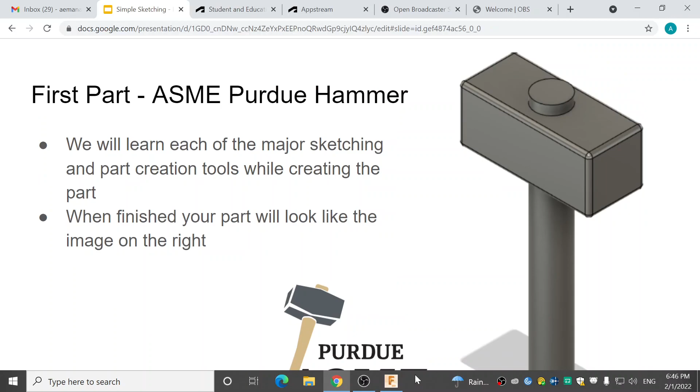First I'm going to direct your attention to the very bottom of the screen. You'll see a small toolbar of 6 or 7 different tools down here. This is going to be very helpful for navigating Fusion when you're looking at parts.

First is the pan tool. It's at the bottom, third from the left, and it looks like a hand. If you hover over it, it says the word pan. If you click on it, that's the pan tool. Now if you use your mouse, or a trackpad, you should be able to move around. It's kind of hard to see because there are no grid lines, so I'll give us some grid lines. The pan tool allows us to move around in different directions.

When you want to get out of the pan tool, go to the top right and you'll have a select button. If you hover over it, it says select, and you can get out of that tool. The next tool I want to show you guys is the zoom tool.

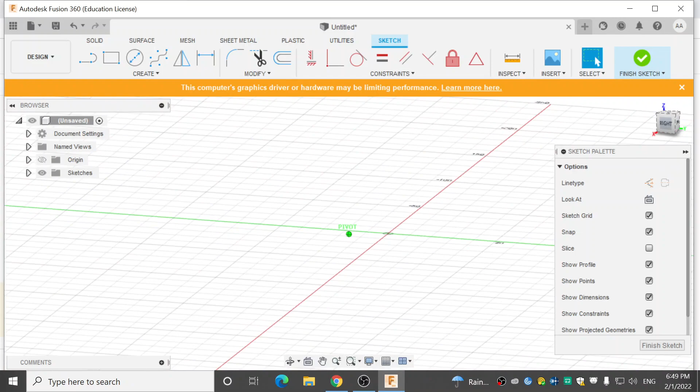If I hold down on the cube, I can drag it and orbit my perspective. So instead of moving in only 2 directions, I can now see a 3rd dimension of the screen. If I click on the word that says right, it will automatically send me to that perspective. I can use these arrows and the edges and corners to send me to different perspectives.

If I click this arrow, it'll send me to front. If I click this edge, it'll send me between the front and left side perspective. If I click the corner, it'll send me to an angle. And the home button will send me to my standard viewing area.

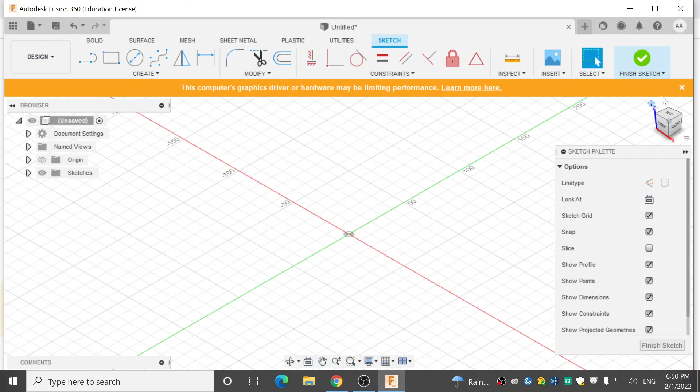So with that, we will get started. First I want to make sure everybody's screen looks at least something like mine, where at the top the word solid is highlighted in blue. If it's not, you might see something a little different, it might look like this or that. You want to make sure you are on the solid bar, because that's what we're going to be focusing on today and for most of our lessons.

The very first thing that we're going to do, to build our hammer, is we have to sketch an object.

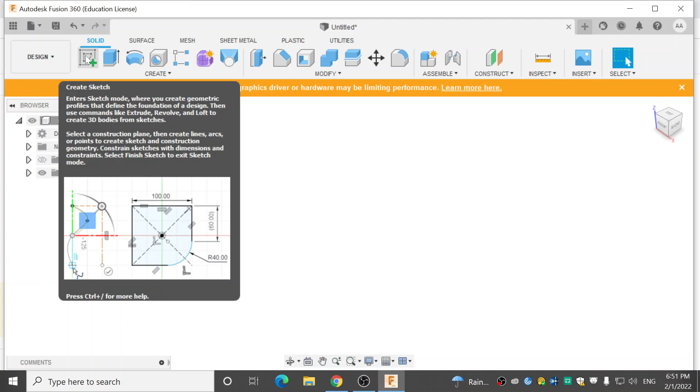We start in 2D, and then from there we'll build up into a hammer. There should be a button with a little green plus sign on it, and if you hover over it, it should say Create Sketch. If you click on that, it will prompt you with 3 different planes that you can choose to sketch on, like the XZ plane or the YZ plane, but preferably, at least for this, we'll be sketching on the ground plane, so the XY plane.

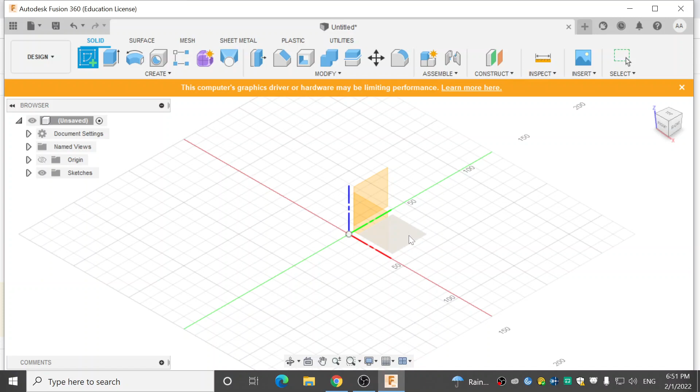When you do, it should automatically send you to this perspective. If for some reason it doesn't, you can find the word top on the rotating cube on the right-hand side, and you should be able to click on that, and it will send you to this perspective.

So the first thing that we're going to see is that our top toolbar is completely changed. It's no longer the solid tools; we're now in the sketch tools. So they do look a little different. So to start our project...

A lot of engineering classes and jobs want you to have your units for your screen set in inches as opposed to millimeters. The standard for Fusion 360 is going to be millimeters. So to quickly change that, you'll see on the left-hand side there's a few different file management tools here.

The first one we're going to look at is Document Settings. If you click down the arrow on Document Settings, you'll see that your units are listed below, and at least for mine, it says millimeters. If you click on the pencil and paper on the right-hand side of the millimeters units, it'll prompt you with something you can use to change your units to. So I can change it to centimeters, meters, inches, or a foot.

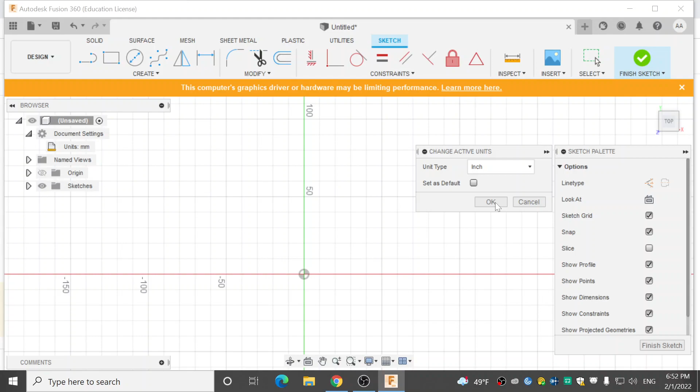So today we'll be using inches. If you're more comfortable with millimeters, that's fine, but we'll be instructing mostly in inches today. Once I've selected inches, I can set it as my default if I want, and once I've decided on that, I can click OK, and it will save my new units.

Now my perspective has changed a little bit, as now it provides me with how many of these squares is a certain number of inches. So the first thing that we're going to do to create our hammer is we're going to go to the top toolbar.

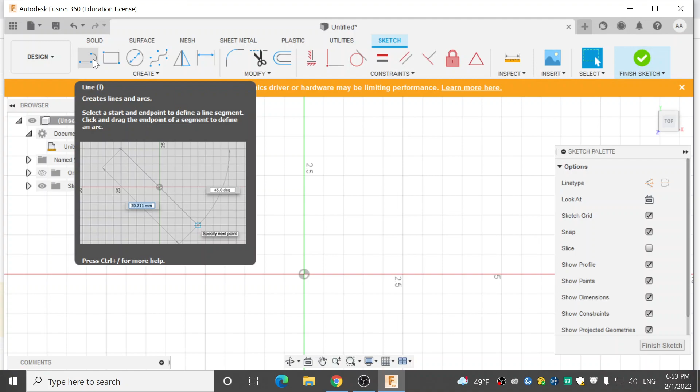There are a few tools listed up here, and these are just your pinned tools. These are what Fusion populates for you to tell you what they think will be most useful. We're going to open up this Create window. There's the word Create; you should be able to click on it, and a whole list of different tools will pop up. You should be able to scroll down.

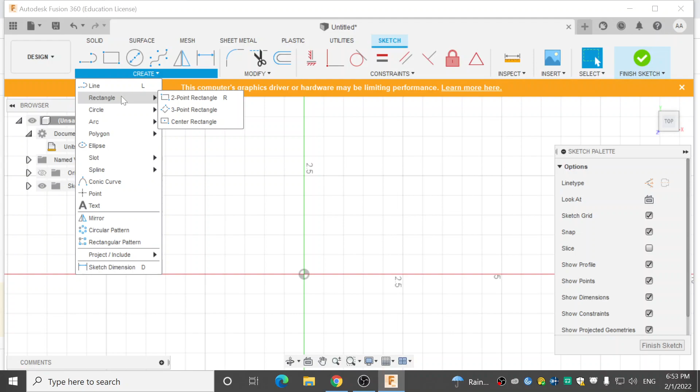We're going to need to start our hammer as a rectangle. If you hover over rectangle, you'll see there are 3 different options: your classic 2-point rectangle, which is typically what we'll be using, your 3-point rectangle, and your center rectangle. Today we're going to be using the center rectangle just for ease of making this hammer.

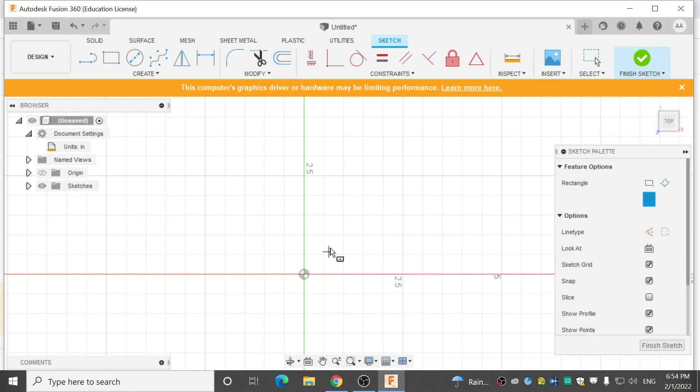So you'll click on the center rectangle, and now your mouse will most likely turn into a plus sign. If you were to click anywhere, you would start to build your rectangle, but for us, we want to start right on the central point between the X and Y axes. So I'll click on that, and visually you might not see anything, but as soon as you move your cursor away, you'll see that you are going to be drawing a rectangle here.

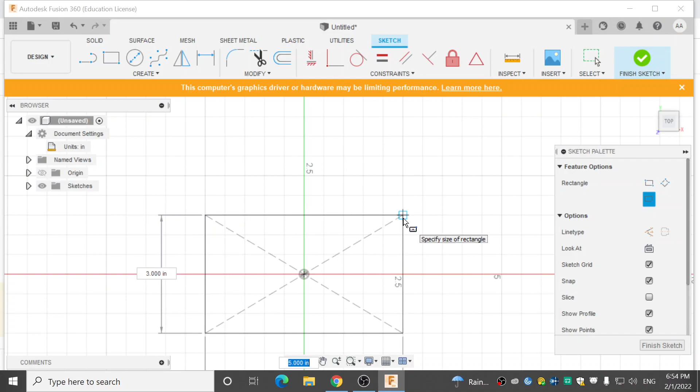So the first thing that we're going to want to do is set these dimensions. We want to have a fully sketch-dimensioned hammer. We want to make sure that we know exactly how big our hammer is going to be, every piece of it. So the first thing you'll notice is as I was moving, one of the dimensions, my base dimension, is highlighted in blue currently.

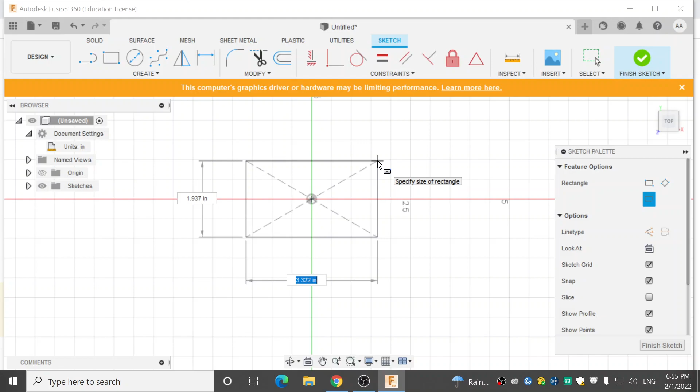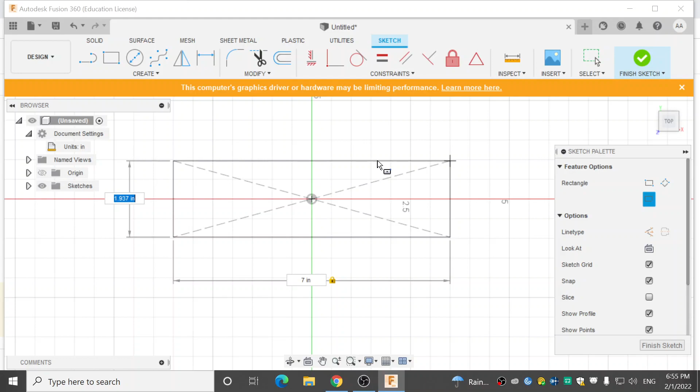This means if I were to start typing into that box, it would change that dimension. For the length of this rectangle, we're going to make it 7 inches. So I can type in 7 space IN, and a little lock sign will show up. Without hitting enter, I'm going to hit the tab button, which will send my cursor into the next box. Now that I've sent that into the next box, I've highlighted my height dimension, and I will change that to be 3 inches.

And now we'll see that I have a decently sized rectangle. I'll hit enter, and now these dimensions here are listed for us. You can click and drag on these lines to move them into position, just to give yourself some space if you didn't like where they're placed.

A plane that is fully sketched is shown with the lines in black. If they are in blue, that means your sketch is not fully developed, and there's something else you can do, either an angle or a length dimension, as well as if the shape you've made is not blue on the inside. Notice how here there's blue on the inside of my rectangle, but on the outside it's white. If it's not blue, that means the shape you've drawn is not a plane, and if it's not a plane, you will not be able to make a 3D object of it. So you always want to make sure your planes are highlighted in blue.

When you're satisfied with the shape you've just made, the next thing we're going to do is go to the big green check mark to say Finish Sketch. There's also another Finish Sketch button at the bottom of this sketch palette in blue, but I typically just use the Finish Sketch at the top right-hand side of the screen. Once you've located that, we'll go ahead and finish our sketch.

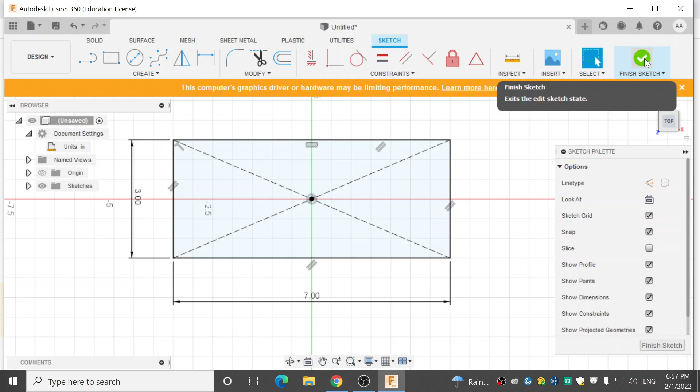It should send your perspective back to your home's perspective. If it doesn't, that's fine — you can always click the house button and it will adjust your screen view for you. For this next step, I would recommend a more three-dimensional view as opposed to the flat 2D sketch view.

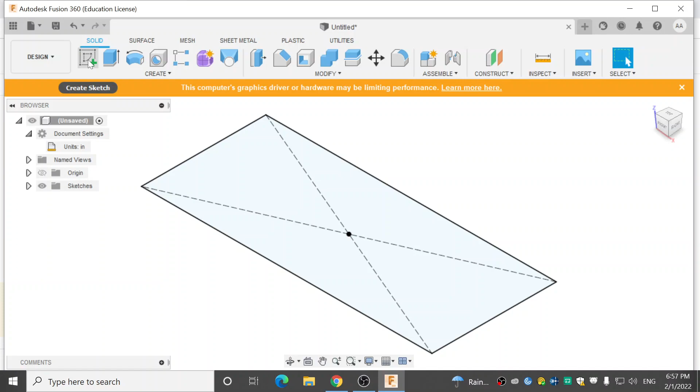If you'll notice, our toolbar at the top now says we went back to solids. We could hit Create Sketch and start another sketch, but instead we're going to use the tool right to the right of that one. It looks like a blue cube with an arrow next to it, and it is called the Extrude Tool — if you highlight over it, it'll tell you that. The Extrude Tool will be able to take any plane you've made and turn it into a 3D object based off the shape you've made.

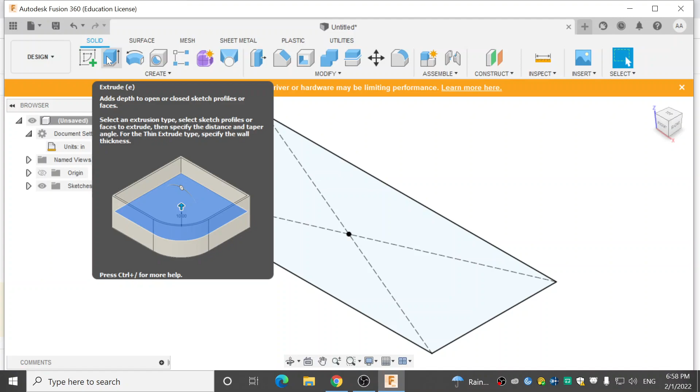If you make a circle, it'll turn it into a cylinder. If you make a square, it'll turn it into a cube. So we're going to click on the Extrude Tool, and it automatically selects my only plane. If you have other planes, you'll be able to click on them. If it selects the wrong plane, the extrude palette to the right tells you one profile is selected — you can hit the X, and now I have no profile selected, and I can manually select a given profile to extrude.

There are different types of extrusions: your standard extrude, and the thin extrude — we'll get into that on a later day, but today we're doing the regular extrude. There's the start, with different options: profile plane, offset, or object. We're starting from this profile plane, but if you wanted to start extruding from a certain distance above what you've drawn, you could use the offset option, or the object option.

For direction, we can extrude from one side, from a different height on both sides, or symmetrically. For us, we're just going to make sure that one side is selected. For distance, if you had another object directly above your sketch plane and didn't know the exact distance — say it's between 30 and 31 inches — you can click on object and select it, and it'll extrude exactly the right amount. But we don't have an object, so we're going to use the distance function.

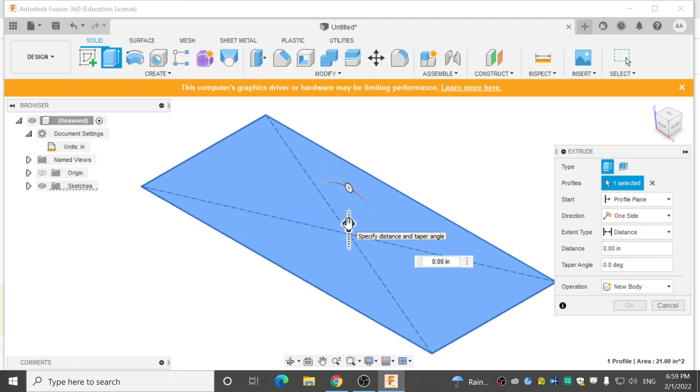For this distance we're extruding, you can either manually type it in, or grab the blue arrow that should be in the center of your square, and drag and pull it up.

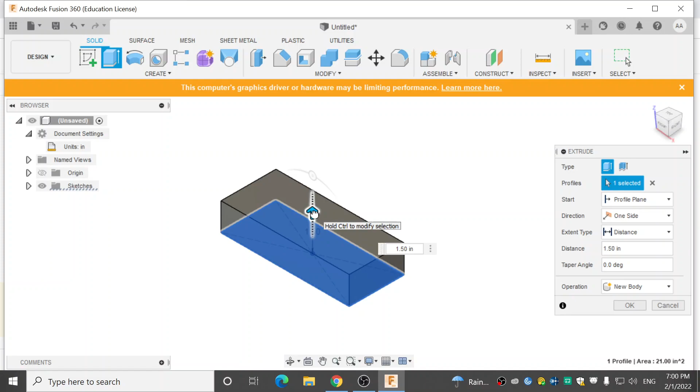The more zoomed in you are, the smaller the steppings are going to be for the extrusion. If I zoom out and drag it up, it'll then propagate by 0.5 inches, as before it was moving up by 0.1.

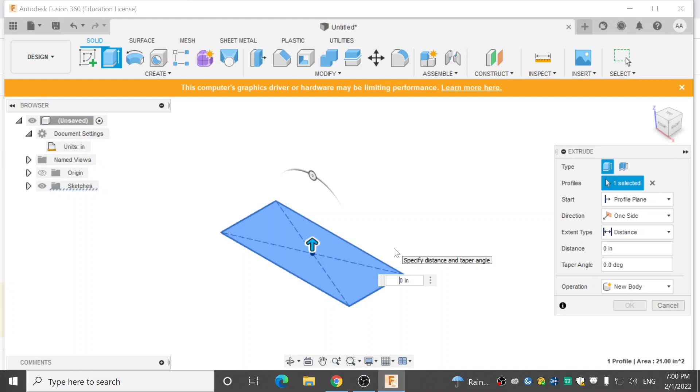But for this, we want it to be a square-faced hammer, so we will make the face of the hammer the same length as our smallest base side, which was 3 inches. So I will go ahead and manually type in 3 inches there.

This operation can happen a couple different ways. We're going to want it to be a new body. There are different options - if we were working with another object, there could be the join feature, which combines our objects. There's also the intersect and cut tools, which are helpful, and we'll get into those another day. So make sure new body is selected, and we will hit OK.

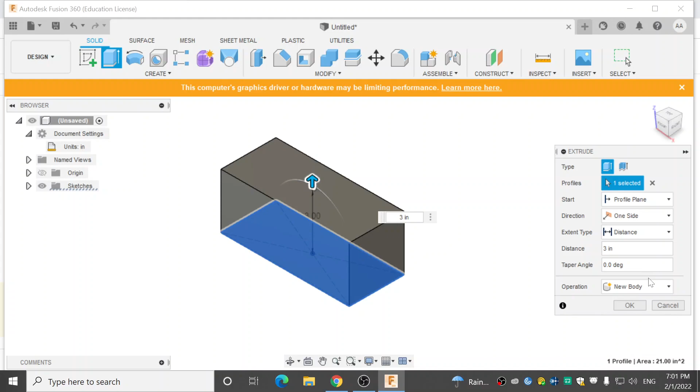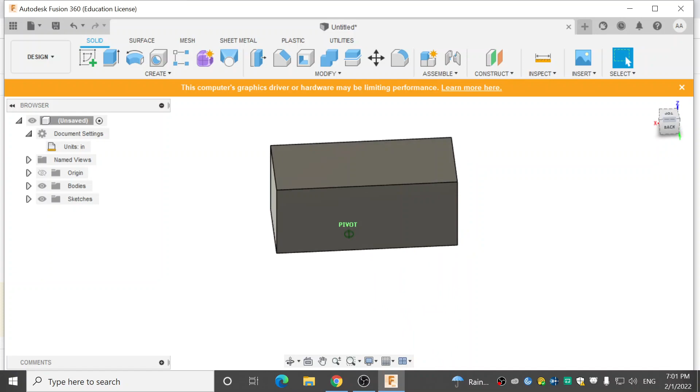Once Fusion has finished loading, you now have a box. You can use your cube at the top right corner to examine your box, your hammerhead, and see how that looks. The next step in building our hammer is obviously going to be the handle.

So to build the handle, we're going to start the same way we did before, and we're going to build a sketch. We'll go to the top toolbar to the far left side and find the Create Sketch button, and click on that.

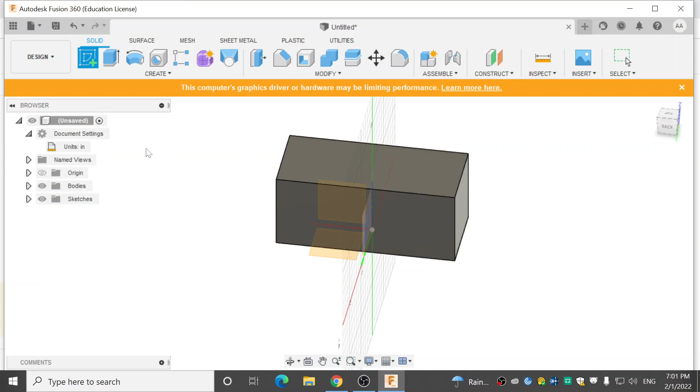Instead of choosing one of these main three planes that have just shown up, we now see that we have the option to click on the faces of our object. So we'll click on one of these long faces, preferably the one that's parallel with the XY plane, and now it will send me to my sketch view.

At the sketch view, again, if yours doesn't send you there right away, you can find the word 'top' on this cube here, and it should send you right to where you want to be. Now that we're on this view, we'll go to our toolbar here, and notice if yours isn't there immediately, that's okay.

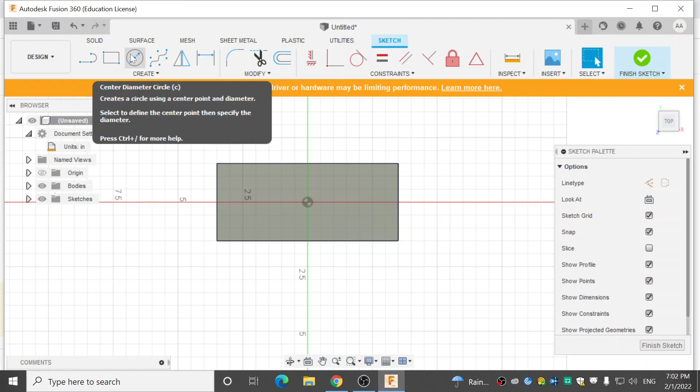We're going to be drawing a circle on our plane here. If the circle isn't there for you, go to the Create tab - underneath Line, underneath Rectangle, there is the Circle option. For our purposes there are many different options, but we want to click the center diameter circle.

Once we've selected that tool, we'll see the plus sign on our cursor again, and we should select the center point of the X and Y axes, right in the center of our rectangular object. I'll click on that, and as I drag my mouse out, it will make the circle at different sizes.

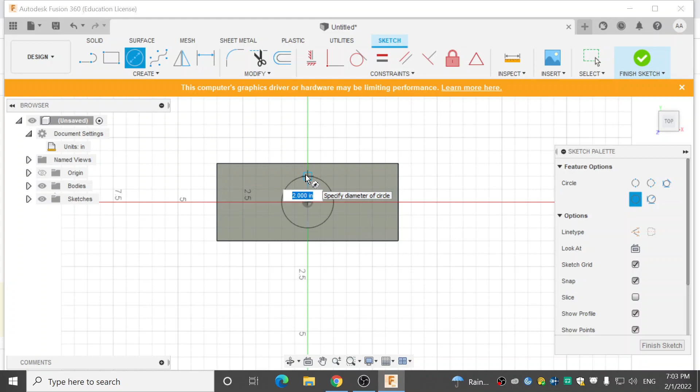Just based on the perspective of how big you made your hammer - for me, because I made the distance only 3 inches, I'm going to make my circle diameter 2 inches. Once I either manually type that in, or find 2 inches exactly like I do on my screen, I'll just hit select, and that will propagate. If you manually typed it in, you can also just hit enter.

Either works. You'll see that now my cursor is still ready to make another circle. I could draw another one without reselecting the tool, but I don't want that, so I'll just hit the select button at the top of the screen, and now I am back in select mode.

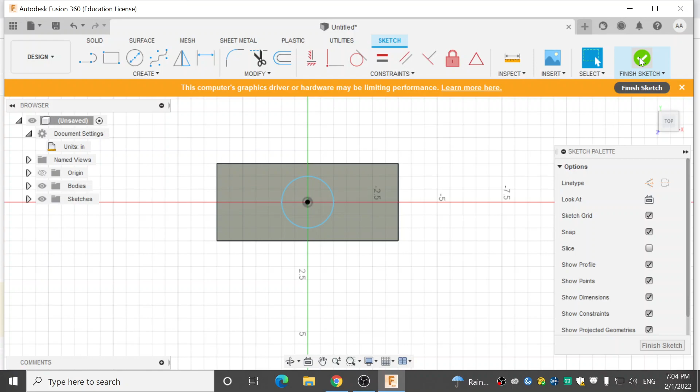Once you're satisfied with your drawing, you can hit the Finish Sketch tool, and it will send you generally back to the perspective you were in before. And if you'll notice, if I hover over the top of my hammer...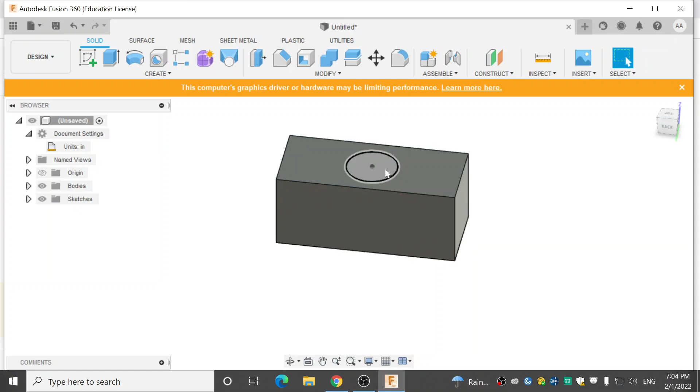There's now a cutout of where that circle is, and I can hover over that circle and it'll only select that circle. This shows me that I was successful in drawing my object and that it is in fact a sketch plane.

So now I will go to the same tool we went to before, which was the Extrude Tool. And once I'm there, I can select the circle that we've just drawn.

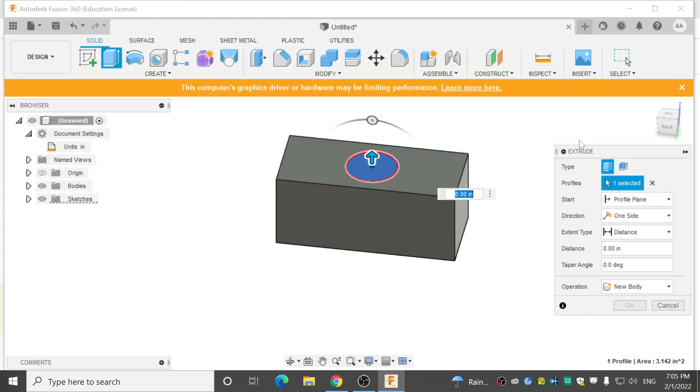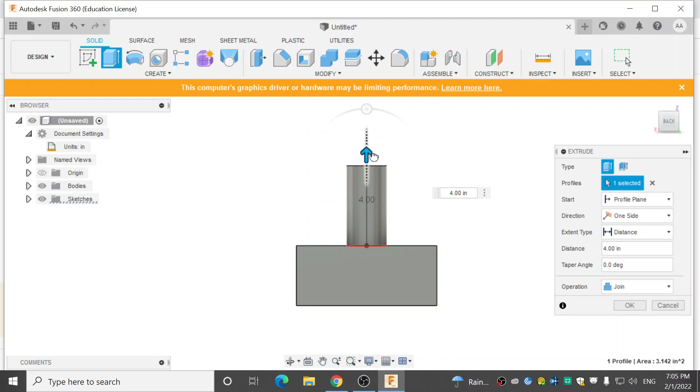Once it's selected, personally, from my own perspective on when I'm extruding just straight up like this, I like to have a more flat view. So I'll hit the words back at the top on my cube, and it will shift my cube so I just see the 2D scan of my object, and from there I can see how long I want to make my handle. I can make it a shorter hammer if I want, or I can make it really much longer. It really just depends on your preferences. For me, I think I'll make my handle length 8 inches long.

Once I'm satisfied with that 8 inches, I'll look over to my extrude functions, and you'll notice that the operation is no longer new body as it was the first time. It's now the join feature. If the join feature is selected, these will become one piece, which is what we want for this object, but in the future you might want 2 pieces separated, and for that you would use new body again. So we're going to use the join function.

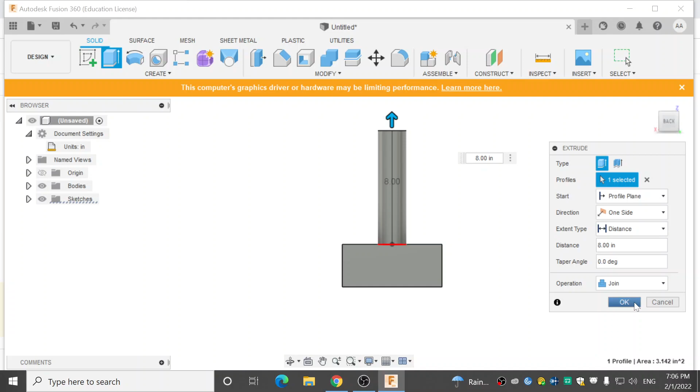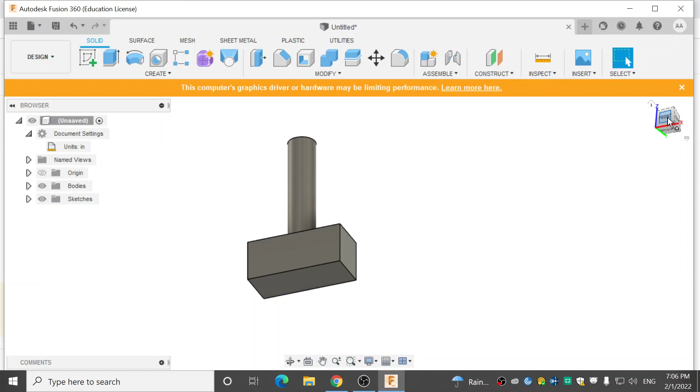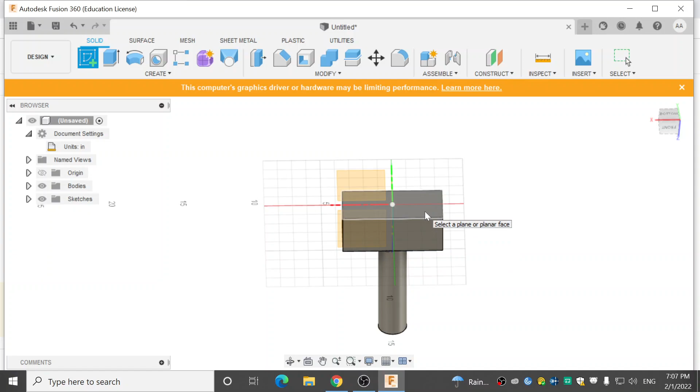Once Fusion's loaded your object, you'll notice you've got your basic shape here. For every good hammer, the top part of the handle is going to show up, so I will use the view cube to change my perspective so I can see the top of my hammer. I will hit, again, the Create Sketch tool at the top of the toolbar. Once selected, I'll make sure not to select the wrong plane, but I'll select the face of my hammer to make sure that I have the right perspective. And it sent me to be looking at the perspective of the top of my hammer.

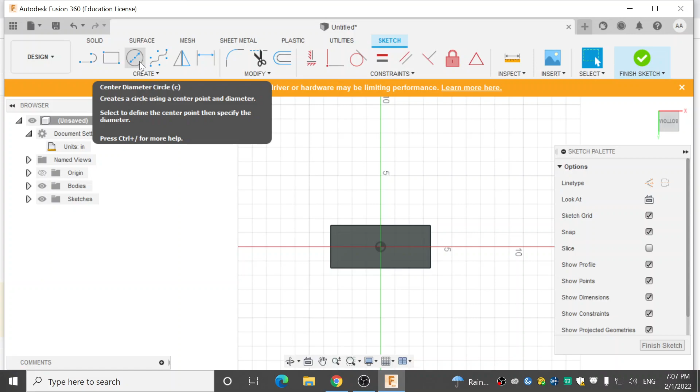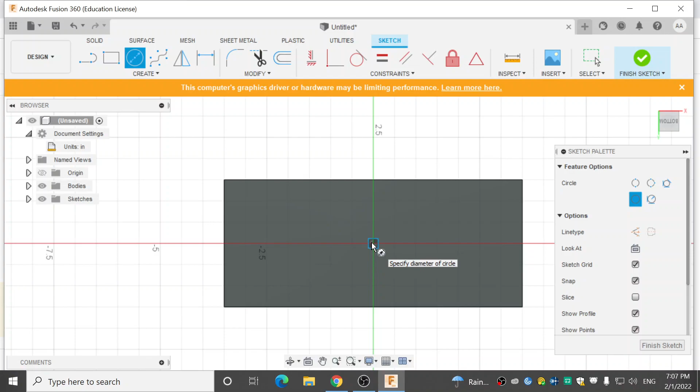So I'll go to the same tool that I did before. Again, we're just going to use the center diameter circle, which for most of you should probably be at the top of your sketch toolbar. If not, you can just go into Create and find it under Circles. I will click the center diameter circle, and I will zoom in so I can see a little bit better, and click on the center point of my rectangle. And from there, I will go out to the exact same distance that I went to when I drew the other one. I remember it to be 2 inches, so I will select 2 inches again.

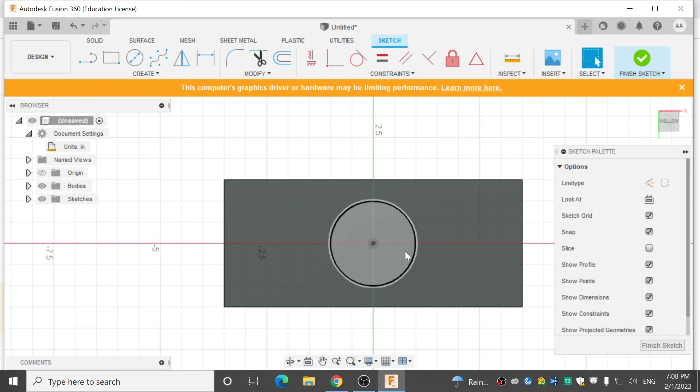And I will hit the Select tool at the top. I want to click the Select tool just to make sure that I actually do have 2 different planes here now, that my drawing was completed. With a tool such as the Circle tool, it would be pretty difficult to not get a sketch plane, but with other tools you might click a button and you won't be able to select this when you need to. So once I'm satisfied, I'll hit the Finish Sketch button at the top.

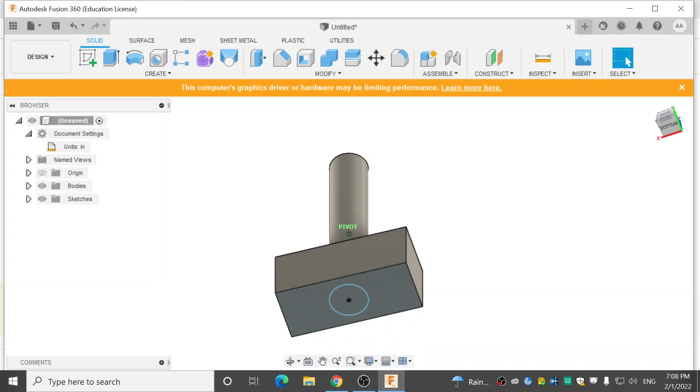And I'll be at this perspective. I don't want to be looking at it directly above it, so I will hit the Home button to give me a new perspective. But I do want to be looking at the top of the hammer, so I will use that view cube again to get a perspective of my choice. This is what I prefer to see. I want to see the circle on top, but not directly, so I can still give it some height. I will hit the Extrude tool again at the top left of the toolbar under Solid.

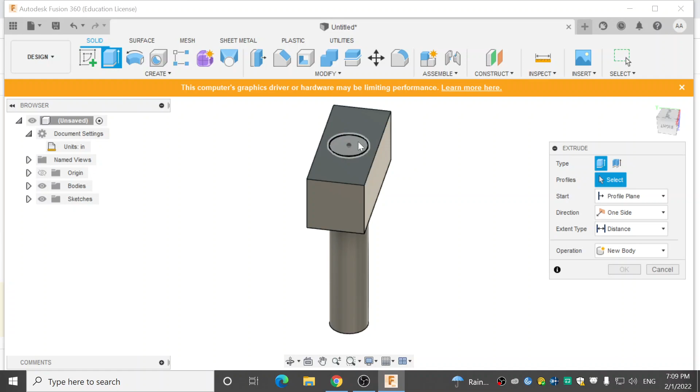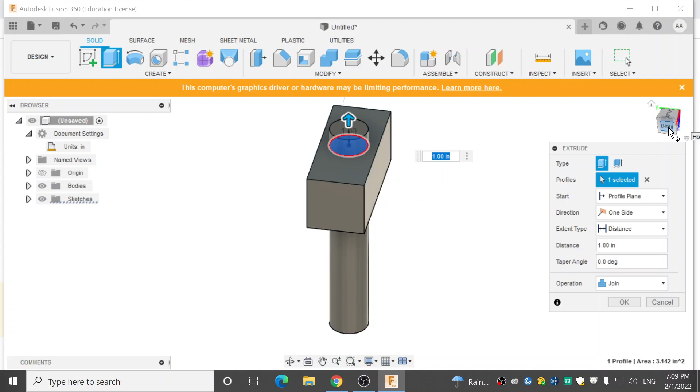And I will select the circle profile that I've just drawn. And I will either use this arrow to add different height to it. Sometimes the perspective that you've chosen might not tell you or show you much, so you can click on the words of your view cube to give you some new perspective. So I'll click on the word right on my cube, and it'll show me how tall it is. I don't think I'll want a full inch for the size of this hammer. I think maybe just 0.5 inches should be good for me. I'm examining the hammer at its different perspectives to see how I like it, and I do. So I'll hit OK.

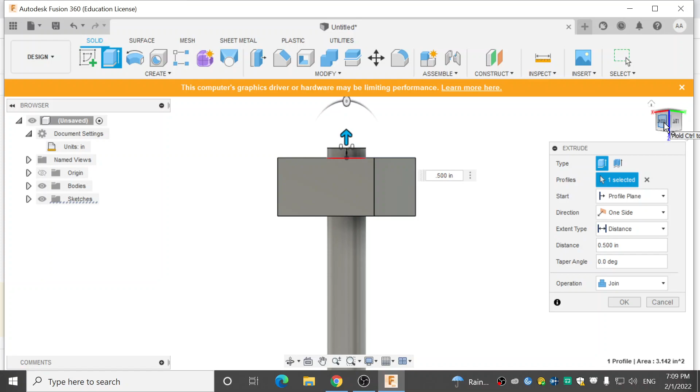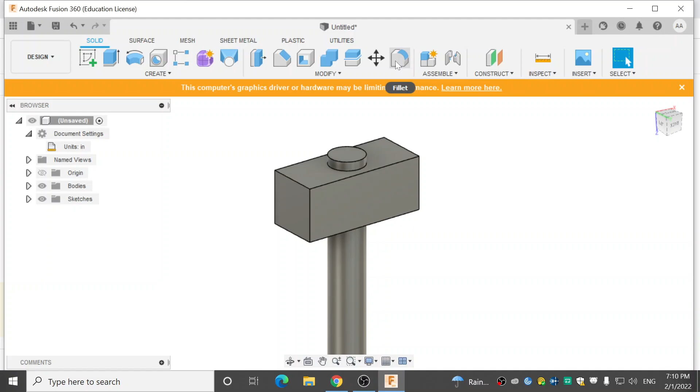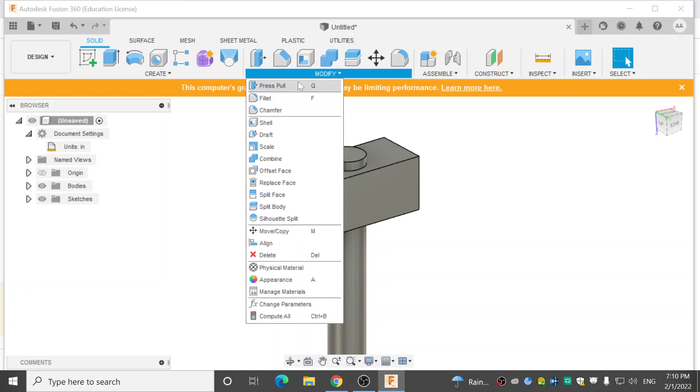And now I have this basic hammer shape, but a hammer is not just a rod and a rectangle. It's also got a little bit of form to it. So we're gonna give these edges something to make it look more like a hammer. Instead of being in the Create section of our toolbar, we're gonna move over to the Modify section. We're still in solids, but it'll be in the Modify section. There's a whole bunch of different tools at the top. The one we are going to be looking for is Fillet, and the Fillet tool should be there at the top, and if it's not, you can just go into the Modify drop-down, and it should be generally up there towards the top, Fillet.

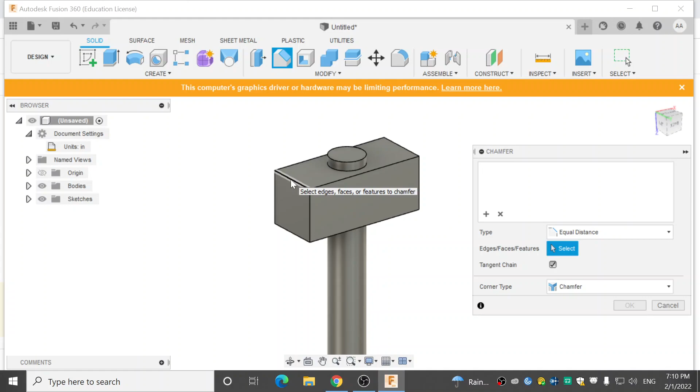And the Chamfer tool will allow us to click those sharp corner edges and turn them into flat spots. So I will select the Chamfer tool. And now if I go around, I can select edges or faces of my hammer. So I'm going to make sure to select just the outer edges. I can do that by hand.

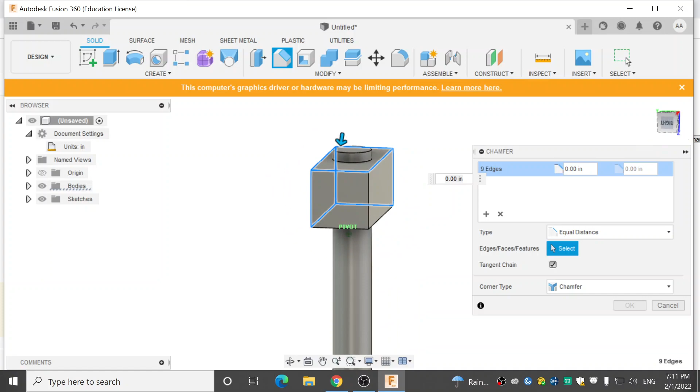And once I've only grabbed the edges in this one perspective, I can just grab my view cube and change my perspective. I'll see that I haven't selected every single edge at this moment yet, so I will grab those.

Once I have all 12 edges of my hammerhead selected, I'll see that a blue arrow is now pointed at one of the corners of my rectangle of my box. I can either, like we did previously, manually type in this box, or I can grab the arrow. For me right now, let's just grab the arrow and see what happens.

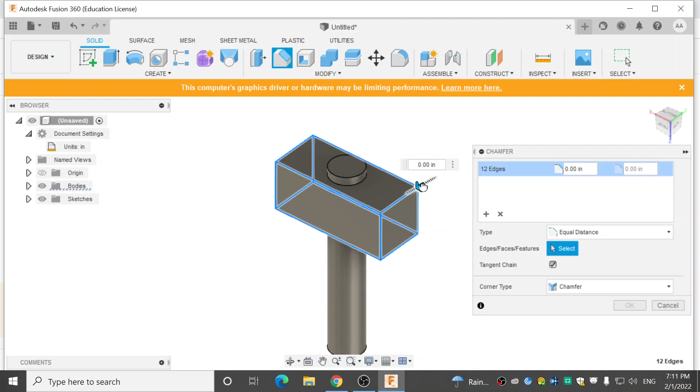I'll grab it and push it towards my hammer, and you'll see that, wow, that was a lot. It will turn all of those edges that we just had into flat spots. I personally do not want my hammer to look like this, so I will change it from a full inch manually.

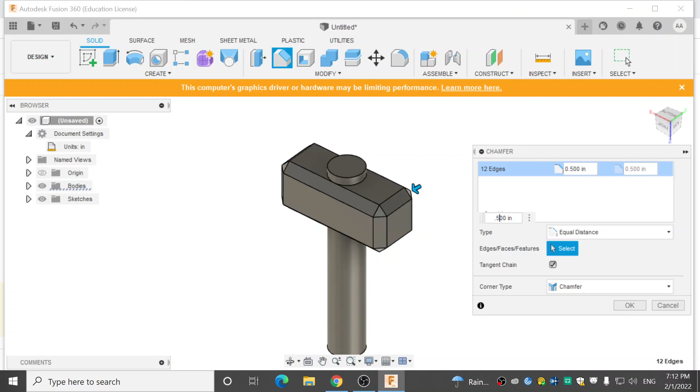Let's say a half of an inch. Still a little much, maybe 0.25 inches. Get somewhere that you're comfortable with. Again, if you zoom in to your hammer, the stepping stones between each of those points to get between these values will change. So before, when I moved the arrow in, it moved it immediately to a full inch, but now I can control by just 1/10 of an inch.

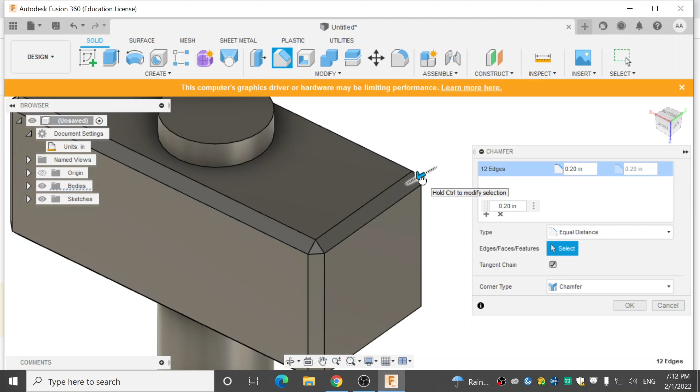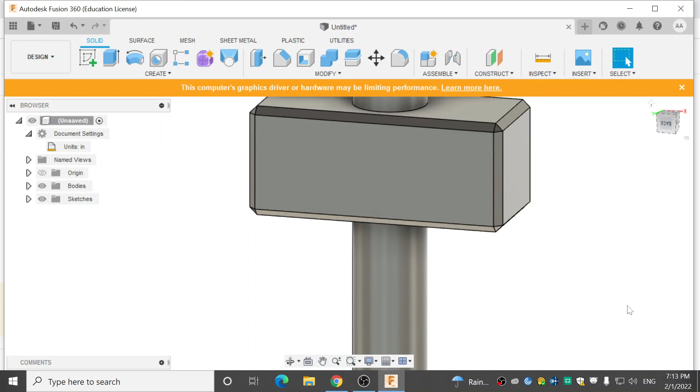I like the look of 0.2, between 0.2 and 0.3 for me personally. Once I'm satisfied with that, I will hit OK. And now I've made my basic hammer shape.

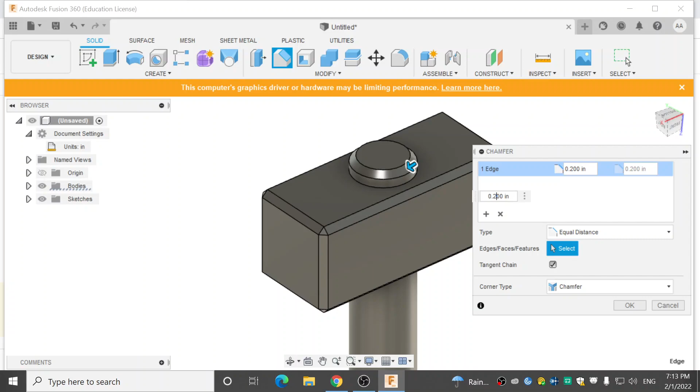It doesn't just have to be straight edges to do this type of tool with. If I reselect the Chamfer tool from the Modify section, I can select the edge of my top cylinder here, and I can do the same thing at the same distance, let's say 0.2, and now I have added a bit of a rivet to the top of my hammer if I want it.

You might prefer it without, and that's okay as well. But yeah, so this is just a very, very basic step-by-step process on how you can make objects in Fusion very quickly. It's super helpful, and in the next coming weeks we'll be making a lot more complex objects.

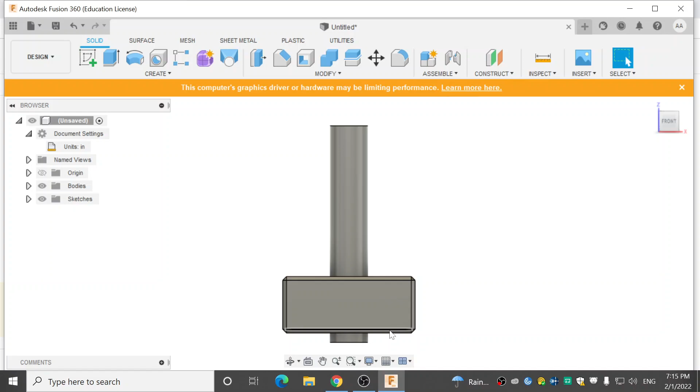Yeah. At the very beginning, when you said that to go, you started on your top face and that was the X, Y plane. If mine was like, say, my top was the X, Z plane, does that matter at all? No, it does not matter.

You can have your own perspective. I will just be doing things based off of the layout of how my fusion looks. I know for some of you, your cube, the XY plane might be, you might have your Y axis straight up as opposed to your Z axis. You can change that in the fusion settings, and if there's need for that, we can go over that in another lesson. But it really does not matter as long as we're all just getting through the process, so we're not getting stuck.

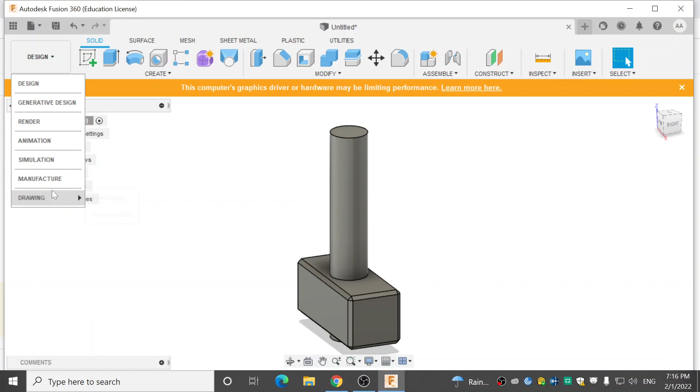Do you want me to explain why it's important? Yeah, so I can elaborate a little bit more on this. It's a little bit more complicated, but if you ever get a position where you are going to be CADing, so let's say you're working in a machine shop, something that you can actually do in Fusion is if you go to this side where it says design, one of the options is to go to drawing. So you can actually go and print this whole part in a drawing. It's an industry standard that you have all these views. And the reason that's important, back to your question, you can ultimately draw it anyways.

You could have this be your top, this can be your top, this can be your top. But by standard, what you're supposed to do is your front view, this one right here, is supposed to represent the view that represents the shape in the best ideal fashion. So this will tell you it's a hammer. This one will not.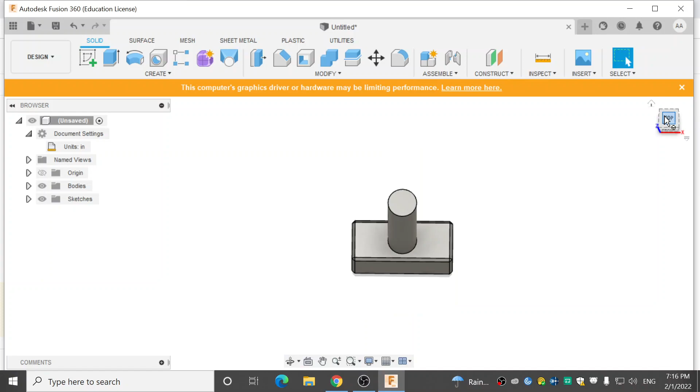It's a more advanced practice, so I'll show you quickly. If you go here, you can actually make a quick blueprint - well, I'd have to save it first. What it's going to do is import the front view. So if you do it in the wrong view, your whole drawing is going to be off, and that's what you'd hand to someone in a machine shop to go make. So in short, it doesn't really matter, but in more advanced CAD, it does matter where you start the point of view of the whole drawing. So hopefully that answers it better.

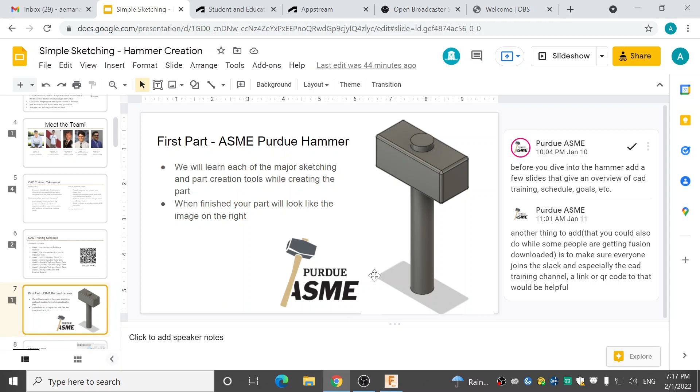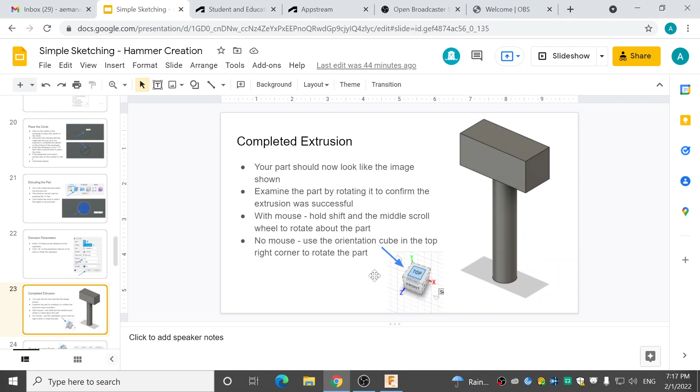Do you want to show them the save part? Oh yeah, that's a good idea. So once I'm comfortable with the final form that I've made, I can - depending on Windows or Mac - hit Control S or Command S, just a quick save.

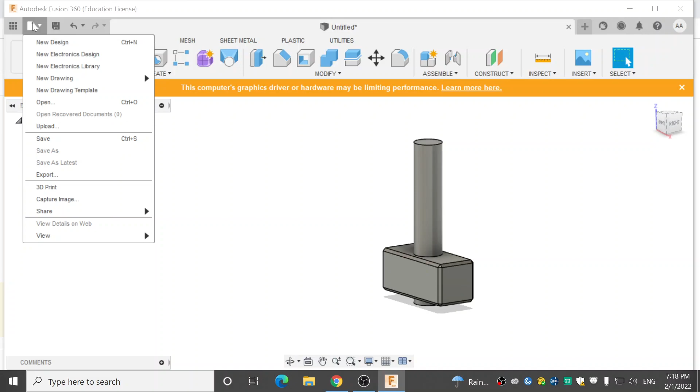But you can also go to File, and hit Save. File is this little paper-looking icon at the top left of the screen. Scroll down to Save, and it'll prompt you with this window. You can name your object - I'll call it ASME CAD hammer.

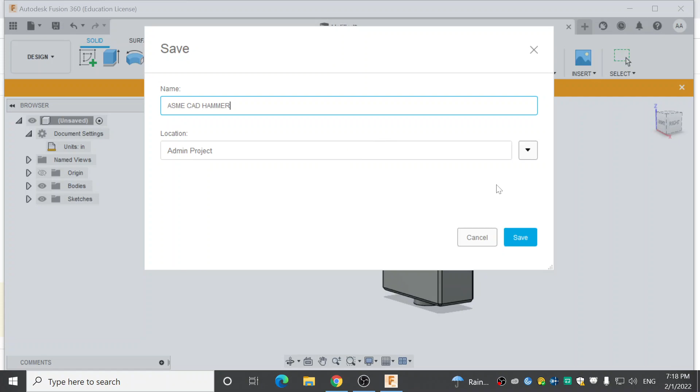You can change the location if you want, and we'll get into that a bit more next week when we talk about basic file management. For now, I'll just send it to my admin project location, where I send most of my projects. I'll hit the save button, and you'll see that once saved, you'll have a little cube at the top next to the name of the object, and no longer an asterisk. An asterisk tells you it's being edited, and now it even has a V1.

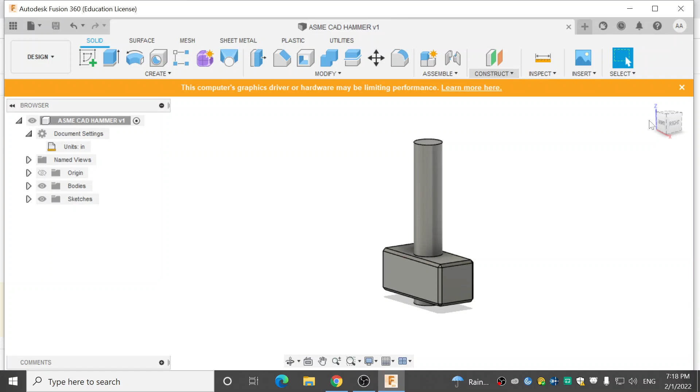So if I were to create a sketch on top of this, at the bottom of this handle here, and just draw a circle, a concentric circle inside, and finish my sketch, you'll now notice I have an asterisk next to my V1. If I just hit Control S or the save button...

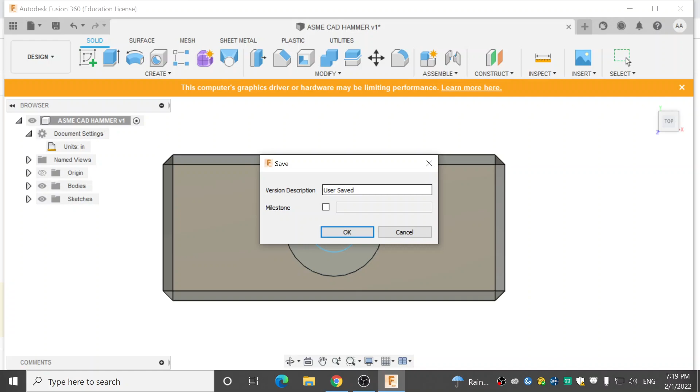I can go into File and Save, or now hit this little save floppy disk looking tool at the top left, and that will prompt me with 'user saved,' meaning you can add a description if you need to, to tell someone else who might be looking at your part the reason for this edit. For right now, I'll leave it as user saved and hit OK. Now the cube will turn into a check mark, then back into a cube. The asterisk will disappear, and now it goes from version 1 to version 2. That will save in your Fusion files.

Saving is obviously very important. I would not recommend waiting to save your big projects until the very end. Things happen - your computer freaks out, it might crash, and you might lose 2 hours worth of work because you forgot to hit 2 keys on your keyboard. So saving is very, very important. Don't forget to do that.